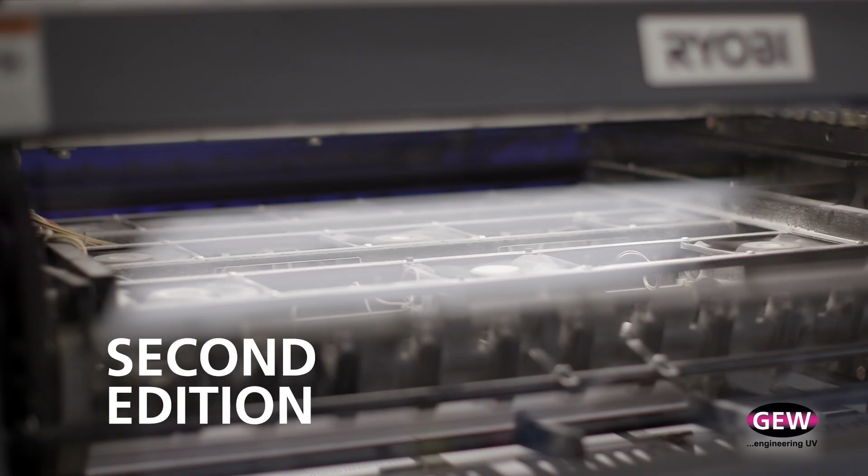Hi, I'm Robert Ray. I'm a director here at GEW and I'm responsible for our technology development program.

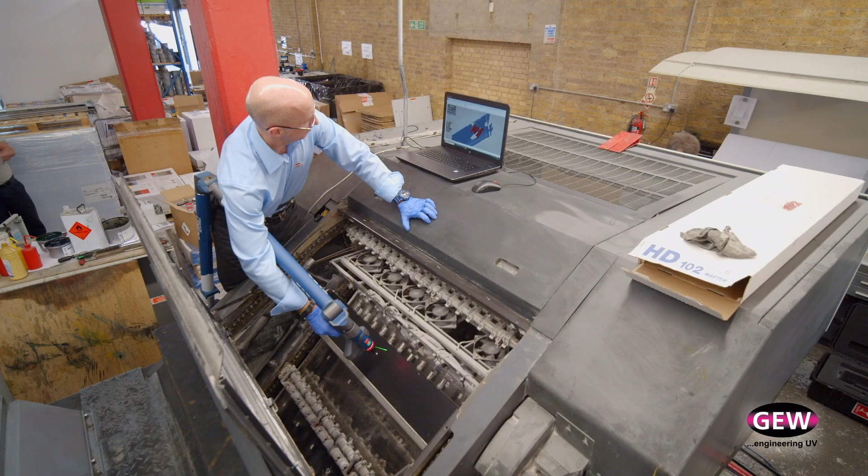In this video today, we're going to be looking at GEW's retrofitting process, and we're going to be showing you in a lot of detail the meticulous measurement, planning and engineering that goes into making sure every UV system retrofit is right first time.

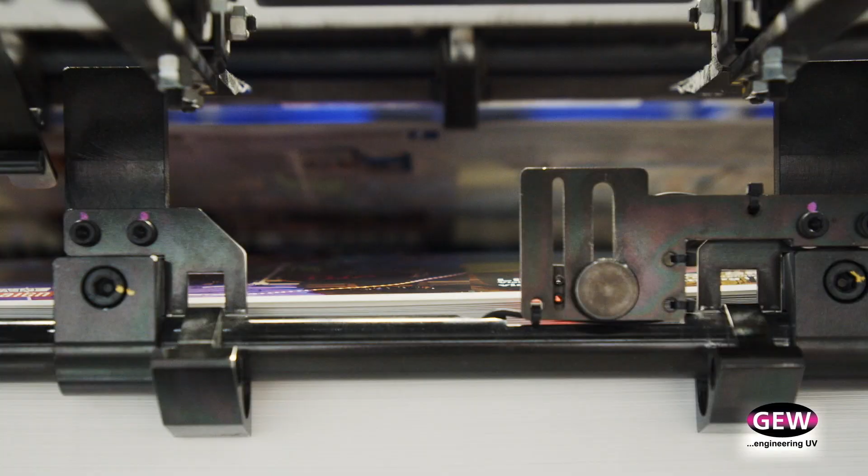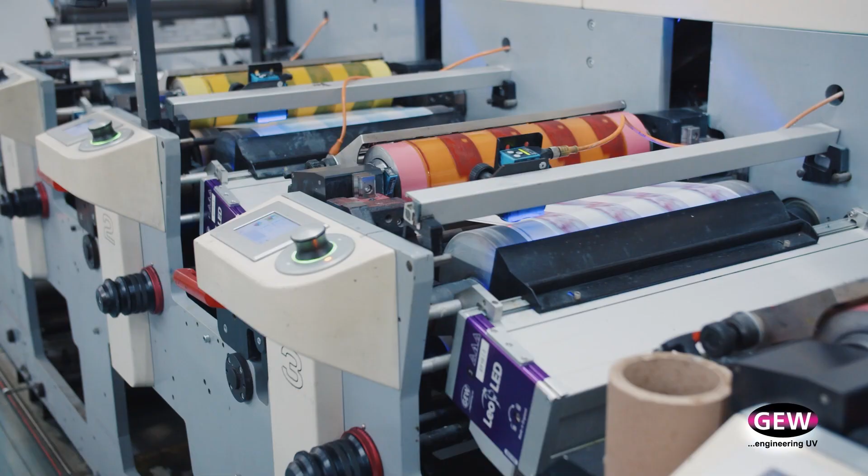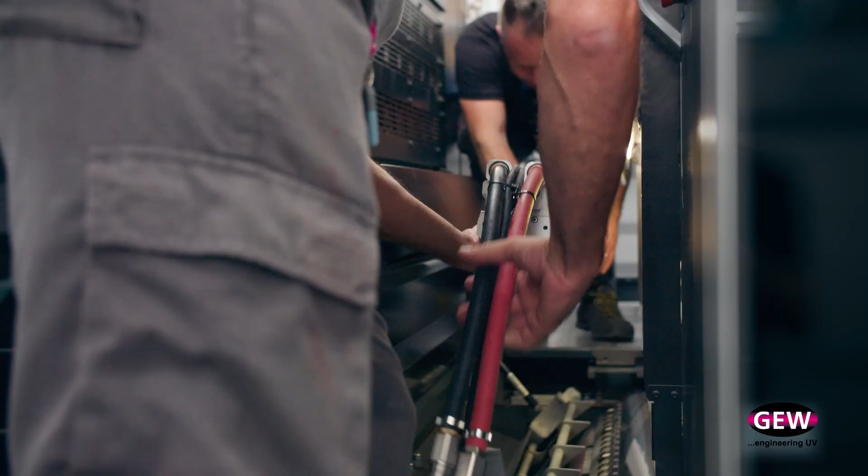At GEW, we understand that a new UV system can have big benefits for a customer's printing machine, but the installation process itself can be extremely disruptive and can cause significant downtime on a machine and loss of revenue. So GEW's retrofit process is all designed around ensuring that the downtime on your machine is at an absolute minimum. We take a less haste, more speed type approach so that we spend more time on the upfront engineering to ensure that the actual installation itself is right first time for you.

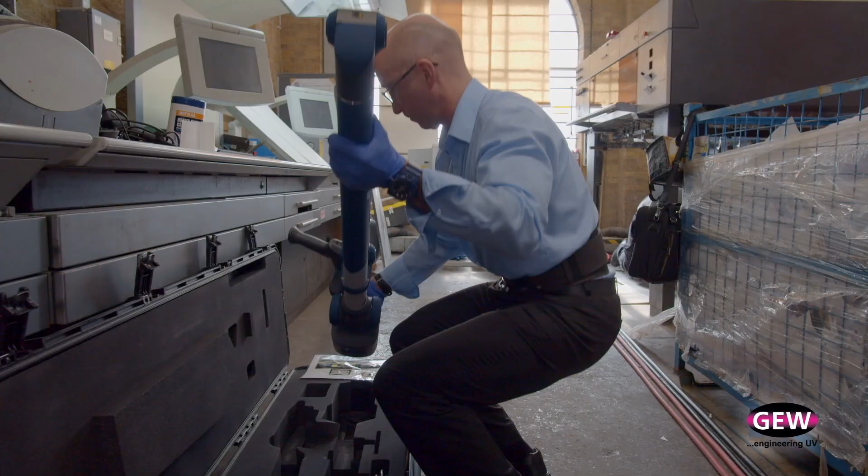After order, the first thing that happens is a GEW engineer from our site here will visit your printing machine with our portable coordinate measurement machine. The FARO scan arm, as it's called, is a laser non-contact measurement device that takes 2,000 points per line and has a measurement accuracy of plus or minus 25 microns.

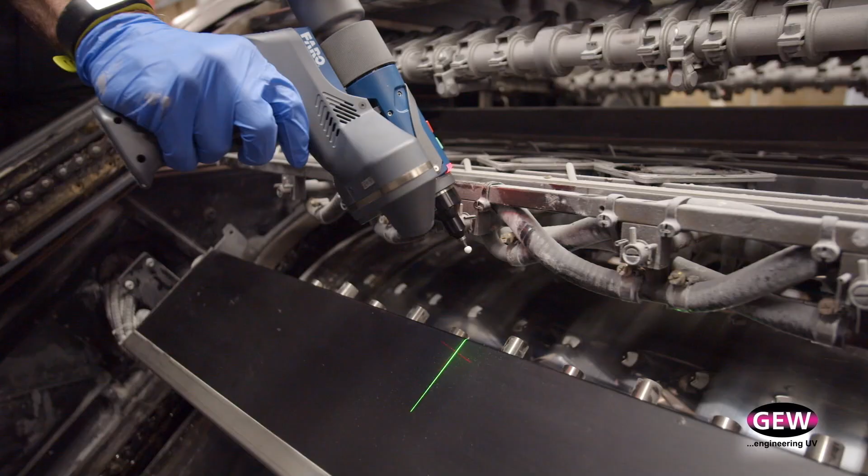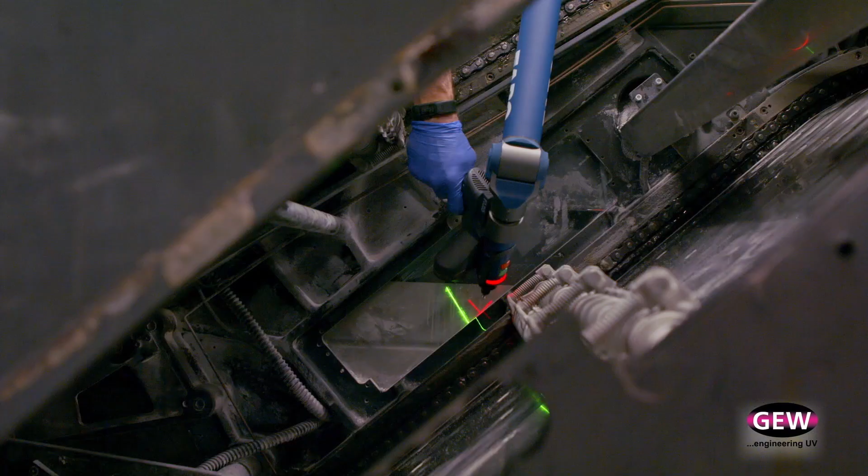The engineer will take that device and he will scan at high speed and with extreme accuracy all of the components and aspects of your machine which are going to be important to enable us to create and design a custom installation for our UV system. Once the scan is taken, and that typically will only take a few hours, the engineer will take that 3D measurement back and convert it into a 3D model on his CAD system here at GEW.

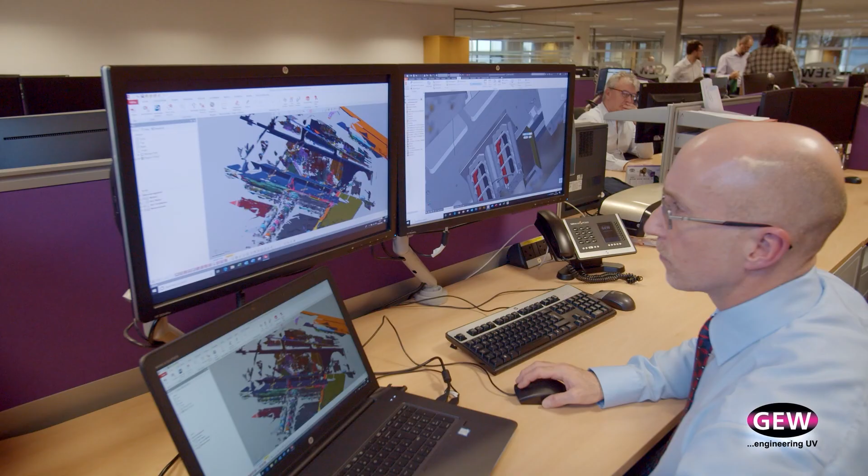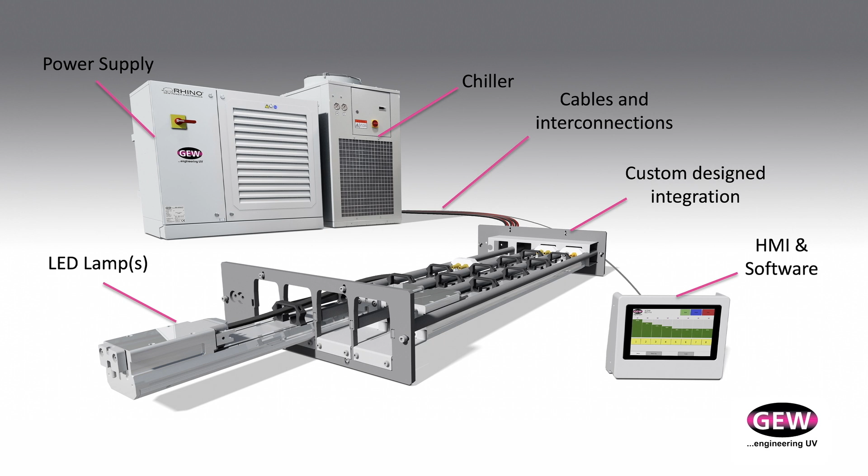A GEW UV system comprises of generic components - things like the lamp head, our power supplies, our HMI, cables, cooling systems that we need to actually make the system work - combined with a specific mechanical integration for your particular machine. It's that mechanical integration kit which is designed by our engineers using the 3D model he's taken of your machine.

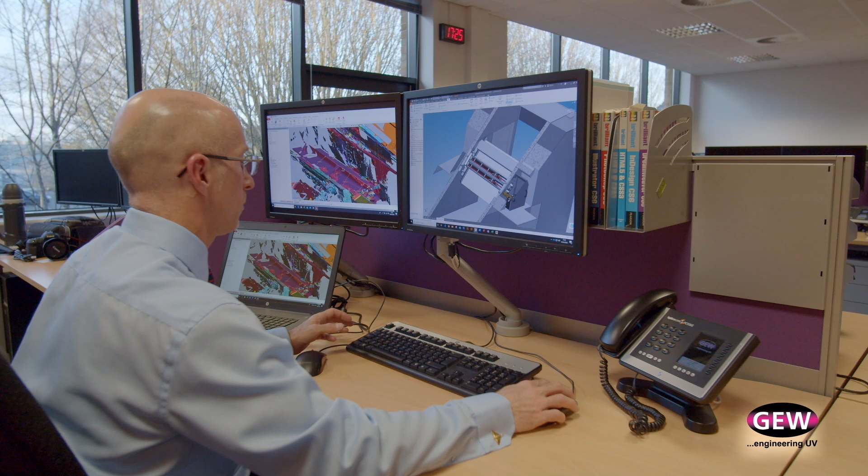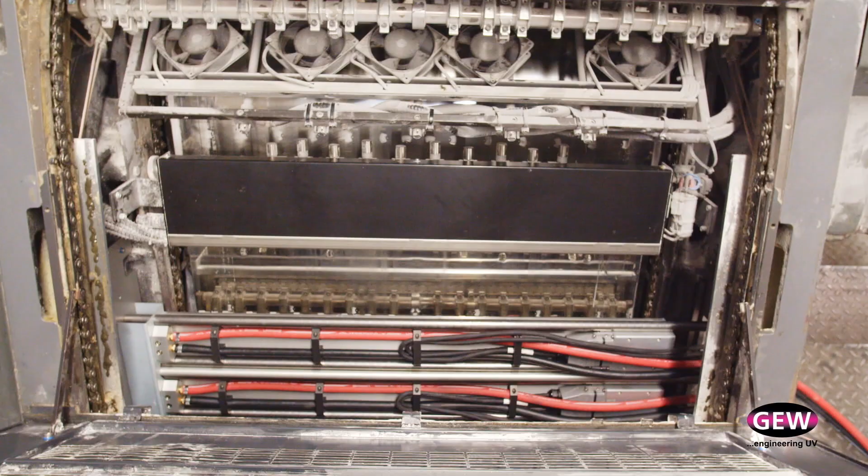Once the engineer has designed the integration for your machine, we take all the generic components, put them together with the specific integration components and test them as one complete system in extreme detail here in our test department before it is shipped to you. What that means is that when we get to site, we know that the system works, that all the components work together, and we can guarantee that the installation is going to be quick and successful on site.

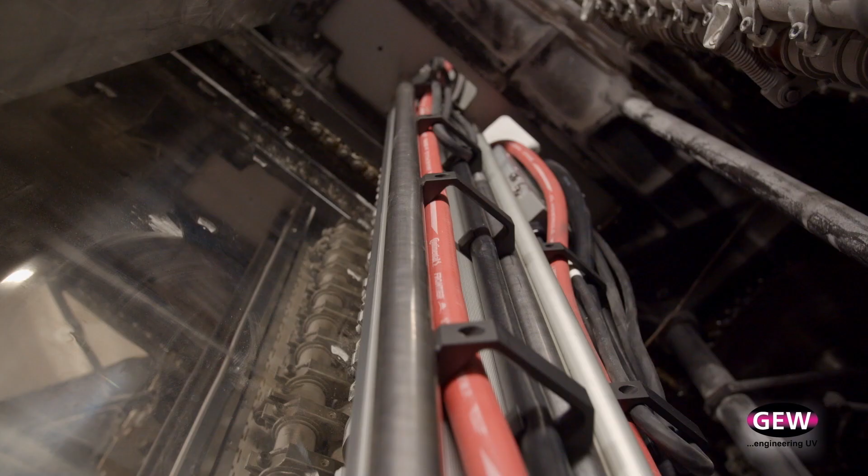We are monitoring your system live in real time. What that means is, if there's ever a problem with your machine, our engineers can log onto your machine and they can see all the aspects that are important to ensure your press is running correctly.

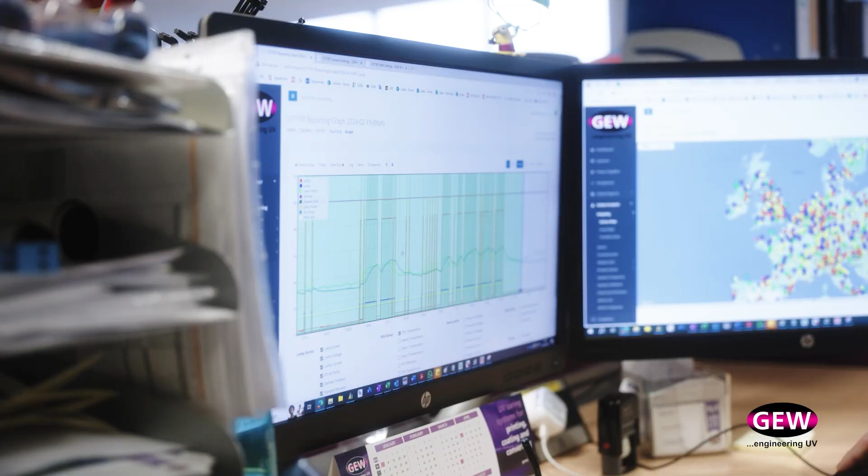What's the voltage of your lamps? What's the current? What's the temperature of the power supply? When did your press start? What speed is your press running? All of these components that we need to know to make sure your machine is running correctly, we can see remotely here at GEW.

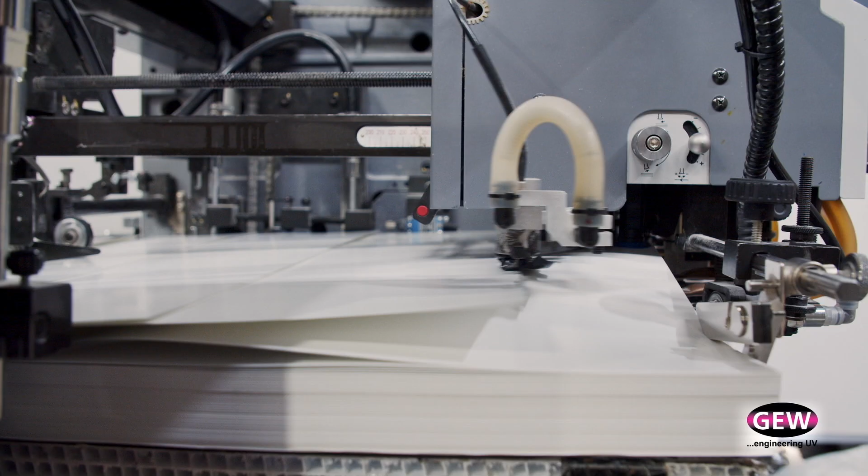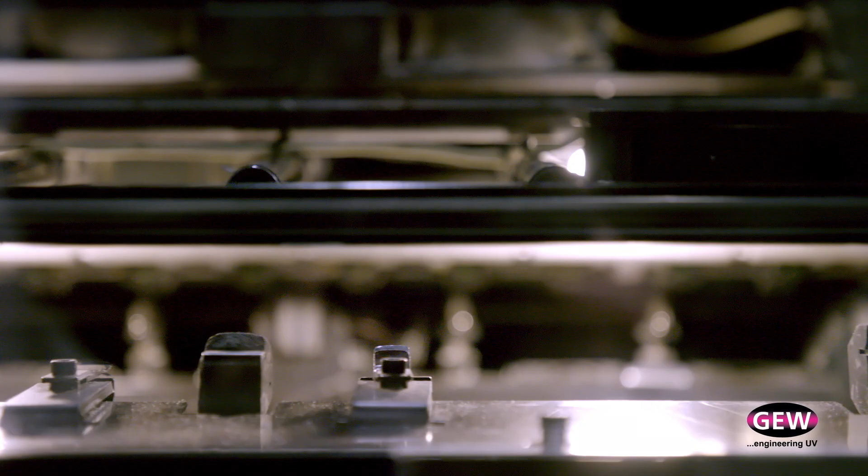And that ensures two things. Firstly, we can take proactive steps to ensure that you don't get downtime in the first place. But secondly, if you do have a problem, we can very quickly, very easily understand what's wrong and take proactive maintenance steps without ever needing to visit site. We can do software updates, we can change settings, and this means that our service process is much faster and more efficient for you, which again ensures minimum downtime and maximum productivity for your machine.

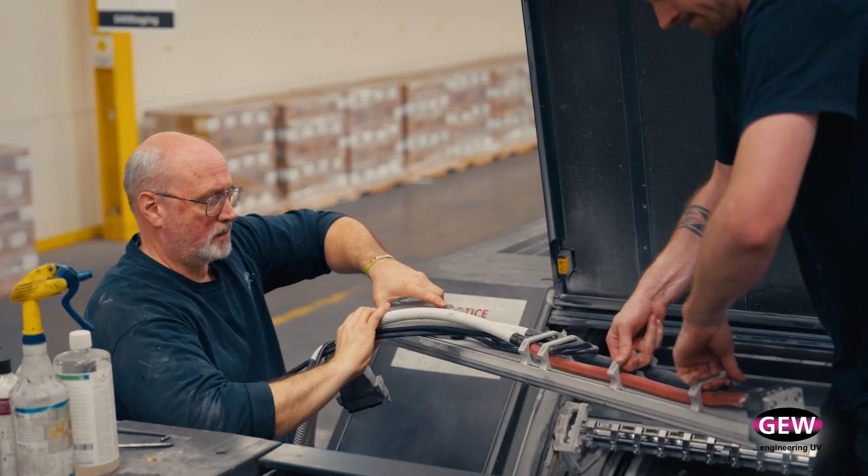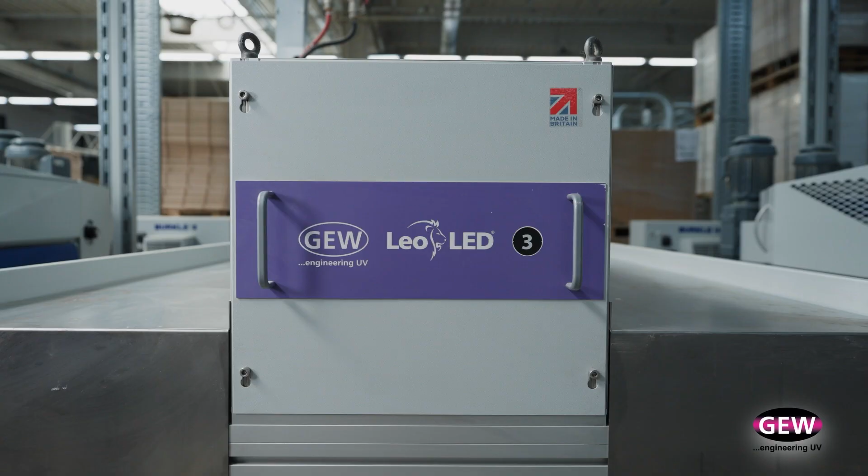Using this retrofit process, GEW is able to mechanically fit our UV systems onto almost any different printing press. You can see here a whole host of different applications and customer projects where we've been able to make a successful installation right first time.

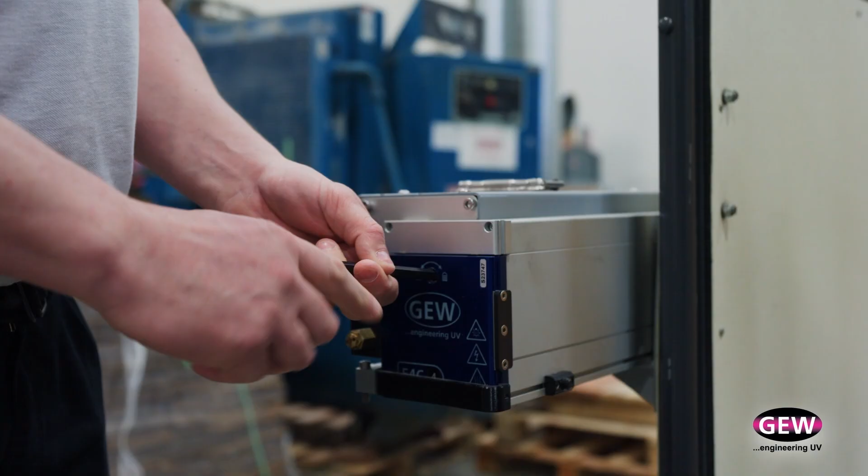The way the system is built, you can tell there's been a lot of good people engineering this equipment, and then the people that came to install it did a fantastic job. It did exactly what I needed from job number one.

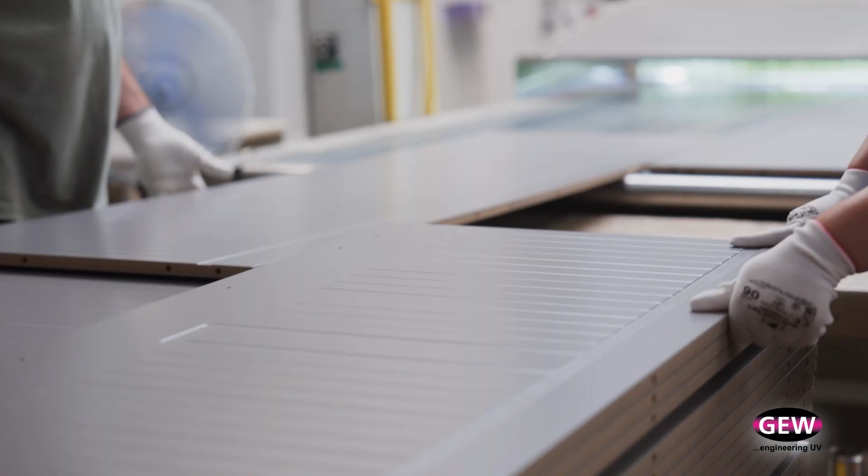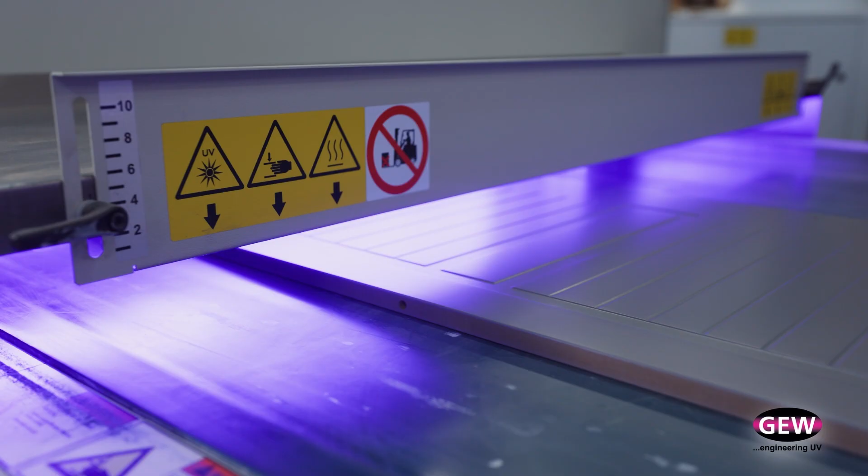We found out that GEW was very flexible. They even offered to do the installation at the supplier of the line, do all the testing there, so we could get the whole line as a package from the supplier with the LED units already integrated, connected, and ready to go. So we just switched it on and it was running.

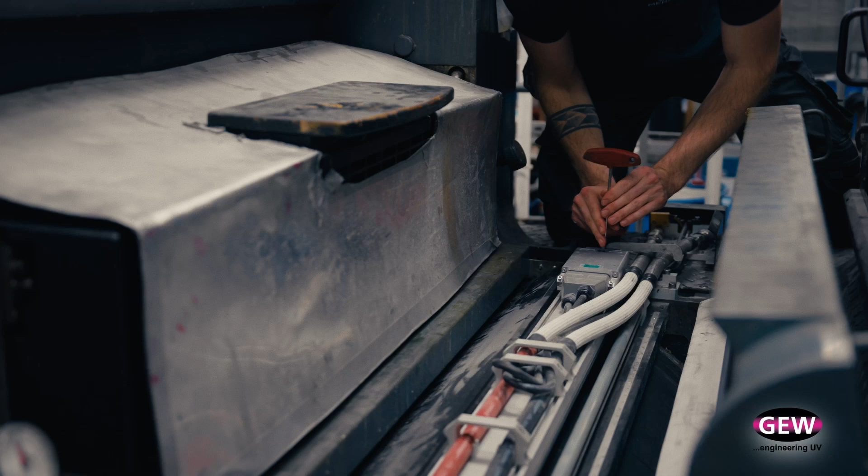Once we decided we were going with GEW, they came in to measure our press out and make sure that they could put these interdeck stations in the machine properly, designing it custom to the machine, which made it go in a lot easier and a lot more effectively.

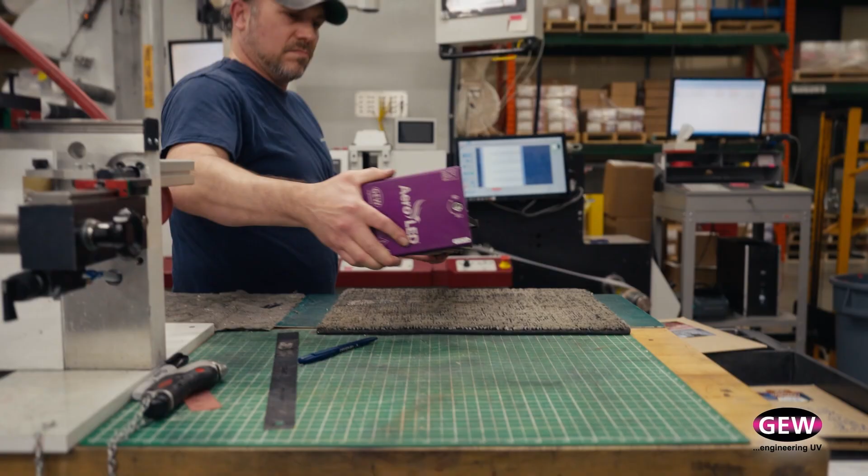When it was all done, it basically looked like it was done by the factory. Installation day, it was seamless. They said it was going to be 8 hours each press. They beat that time. It was probably around 6. They stuck around, made sure it was running to optimal, and then they worked on the next press.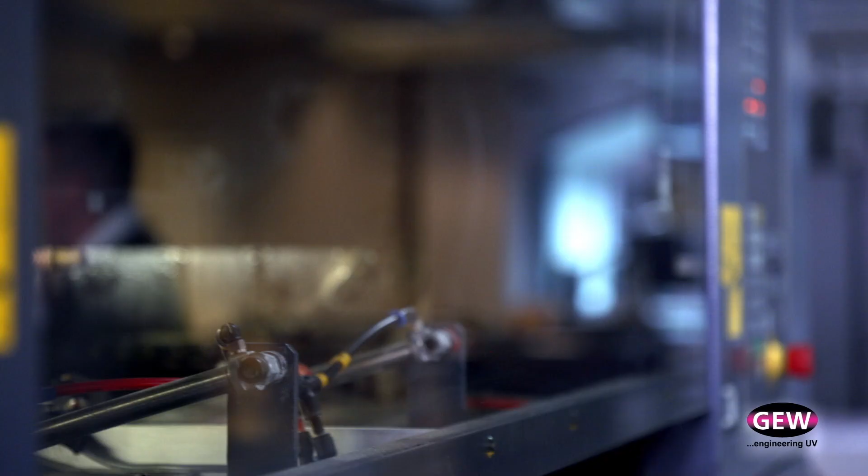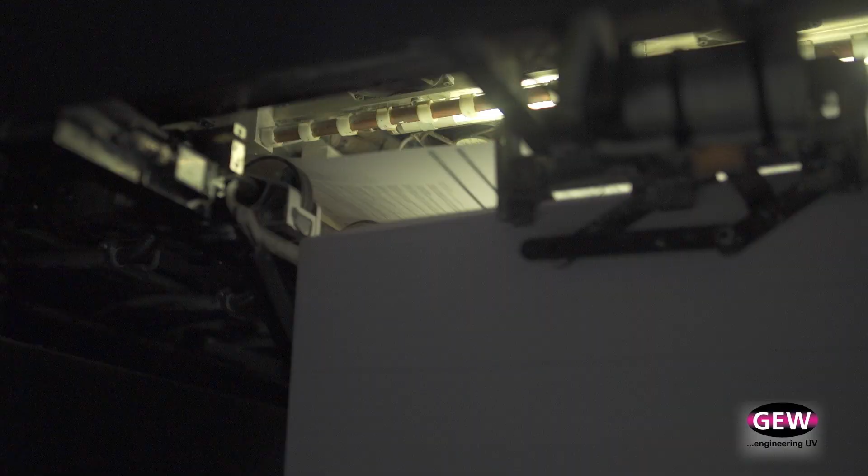We knew that big advantage for GEW was that we can retrofit the same solution on 3 different manufacturers' presses and produce the same results. One of the cleanest installations I've seen in the 30 years of being in the printing business.